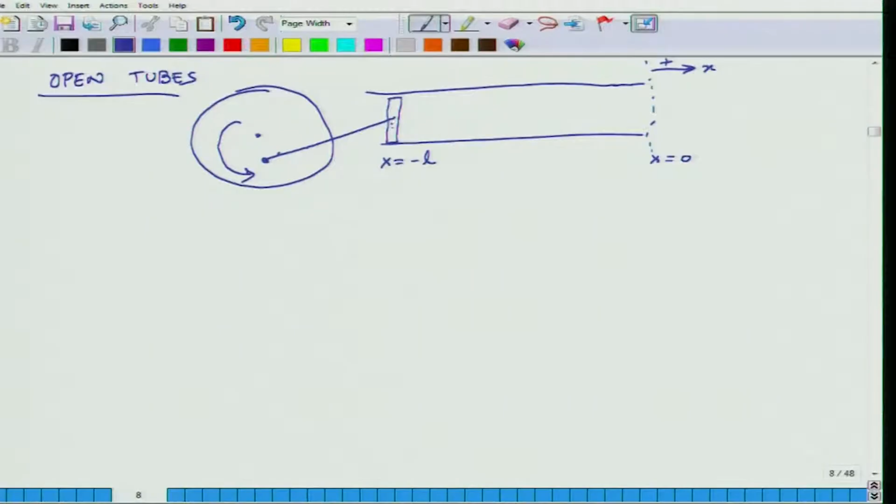In the case of the closed tube, we had said that we know the pressure at x equals minus L. Today we will make a little different assumption: because I know how much the piston is moving, we know the value of US, the source velocity, because this is where the source of sound is. So velocity at minus L at any time is given as some real constant US times cosine of omega t plus phi. So this is the velocity at x equals minus L.

So once again we have two boundary conditions. There is an open end at one end of the tube, and then the other end, x equals minus L, where we know the source. Now at the open end, we have to convert this physical situation into some mathematical relationship. So we know that the ambient pressure here is P naught, because the overall atmosphere is there.

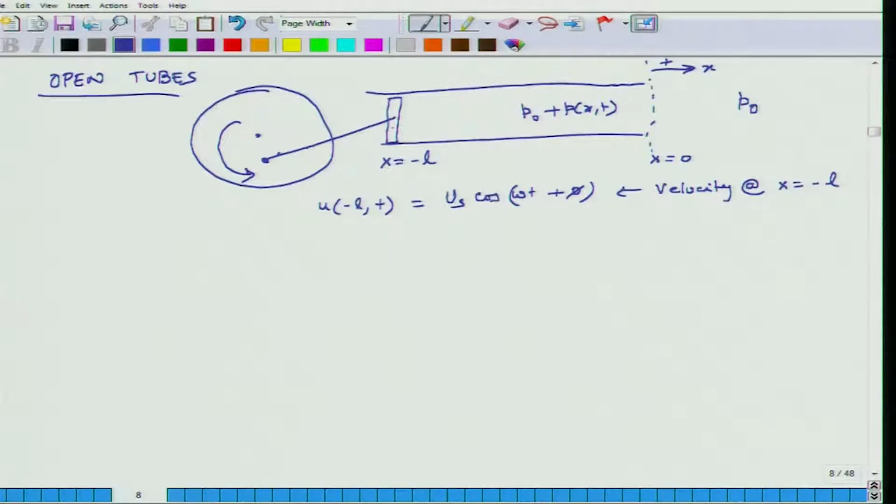Inside the tube at all points we have P naught plus p as a function of x and t. So the pressure inside the tube is P naught plus a small perturbation in pressure, lowercase p, which varies with x and t, and outside the tube the pressure is P naught. What that means is that as I approach this boundary, the magnitude of p has to become less and less, and at the boundary p of 0 and t should be 0.

So this is one boundary condition from a mathematical standpoint: when you have an open tube, at its open end, in this case x equals 0, the value of p, the perturbation in pressure, is 0. And the other boundary condition says that I know the particle velocity at x equals minus L, and that is the same as the velocity of the piston, which is US cosine omega t plus phi.

So these are the two boundary conditions, and just like in the case of the closed tube, we again have 4 unknowns, 2 equations, and the 2 extra conditions are these 2 boundary conditions. Once we apply them, we get the solution for the system. So we will do a similar thing as in the case of closed tubes. We begin by writing these transmission line equations. So these are general transmission line equations which are valid for all 1D planar flow situations.

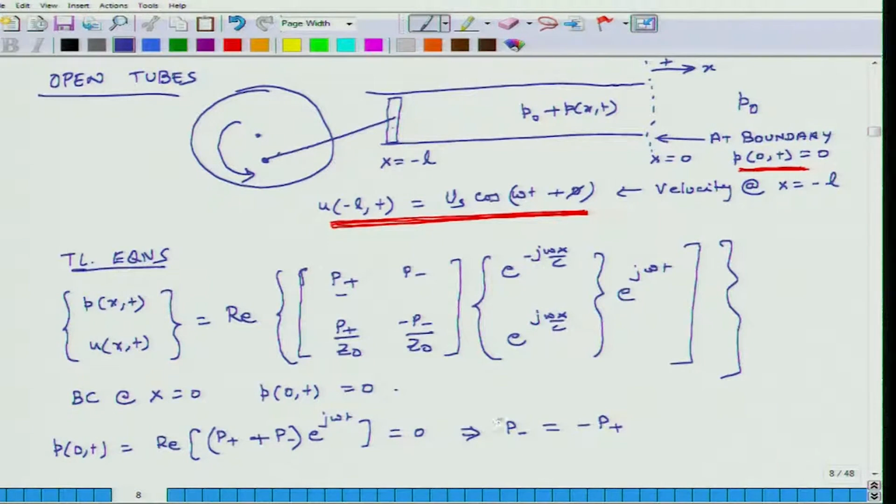And this gives us the condition that P minus has to be equal to minus of P plus. Okay. So I put this condition back in my transmission line equation, and I replace P minus with negative of P plus.

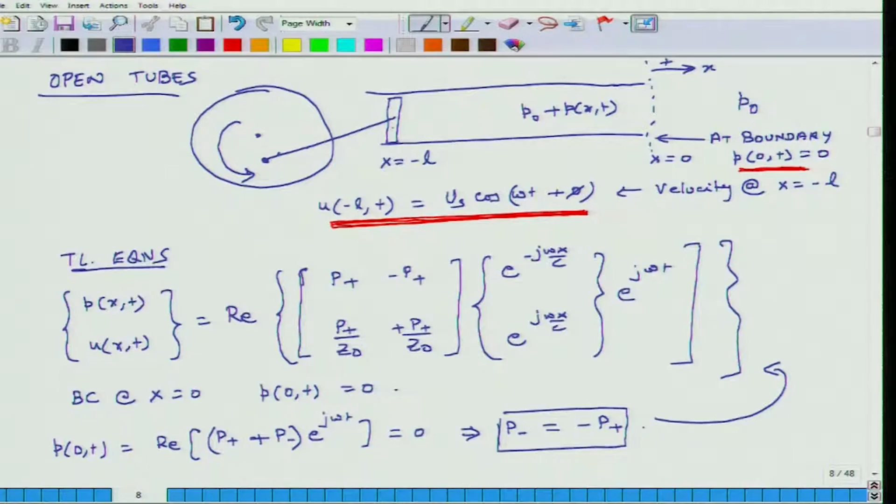So, I am left with, and here I get a positive of P plus. Okay. So, now I have used one of my boundary conditions, and what I will do is I will again rewrite these equations, and this is equal to real of P plus (e^(-jωx/c) minus e^(jωx/c)) e^(jωt).

So, this is the equation for pressure using this modified transmission line equation, and the equation for velocity is real of P plus over Z0 (e^(-jωx/c) plus e^(jωx/c)) e^(jωt). Okay. So, these are the transmission line equations for open tube. Doesn't matter what is the condition at the other end where the piston is moving back and forth, but as long as this end is open, these equations are good.

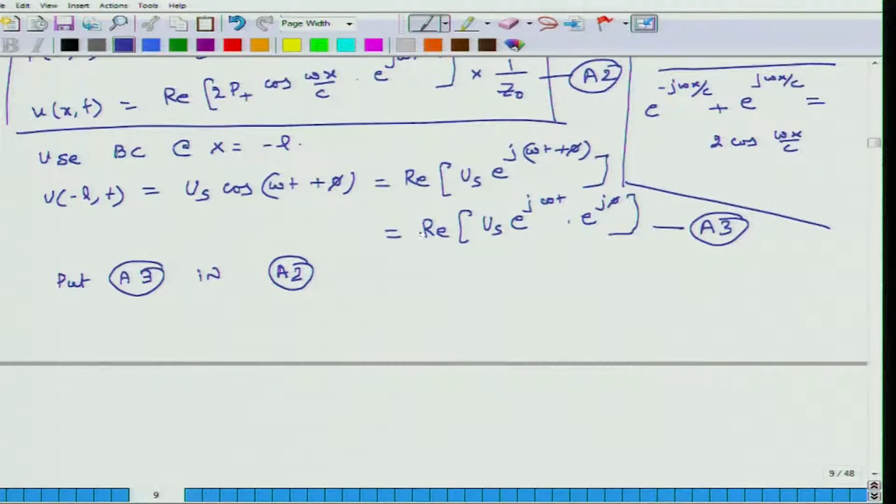So, let us call this equation A1, this equation A2, and this equation A3. So, what we do is we put A3 in A2, and we solve for P plus. So this thing goes on the left hand side. So, what I get is real of US e^(jωt) e^(jφ) equals real of 2P plus cosine, and here the value of x is minus L, and cos(-ωL/c) is the same as cos(ωL/c). So this becomes cos(ωL/c) e^(jωt) times 1 over Z0.

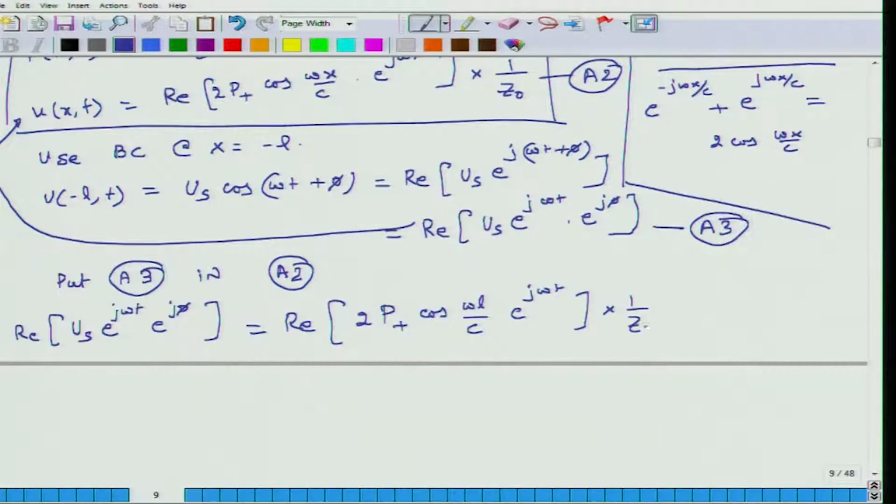Okay. So if these two sides have to be equal, then the terms in the parenthesis have to be the same. So I can drop the real, and then e^(jωt) and e^(jωt) cancel out, and what I am left with is that P plus equals US times Z0 divided by 2 cos(ωL/c). Yeah. So this is my A4.

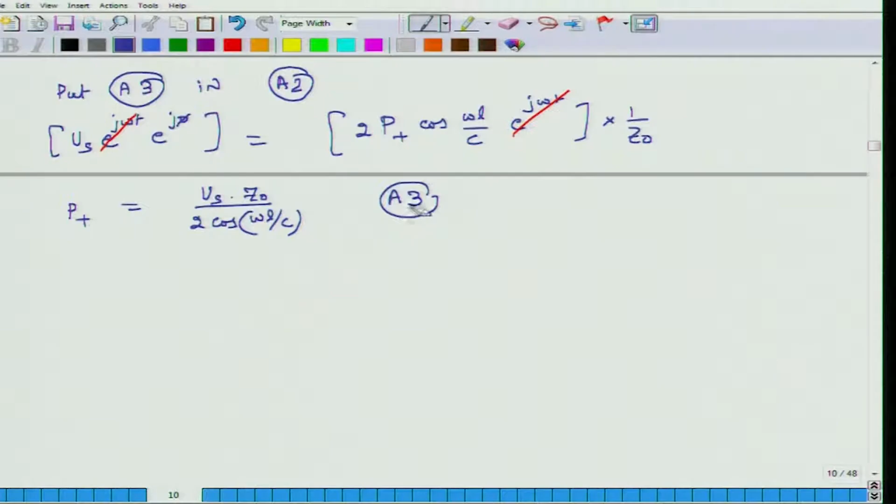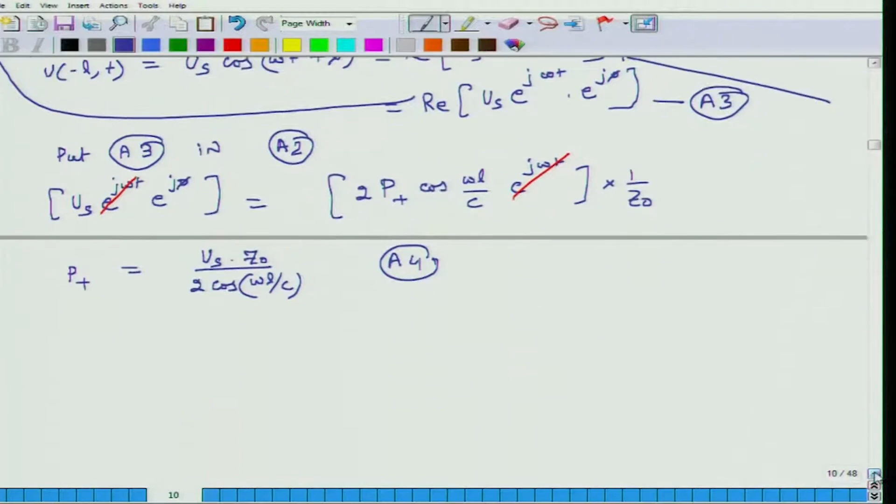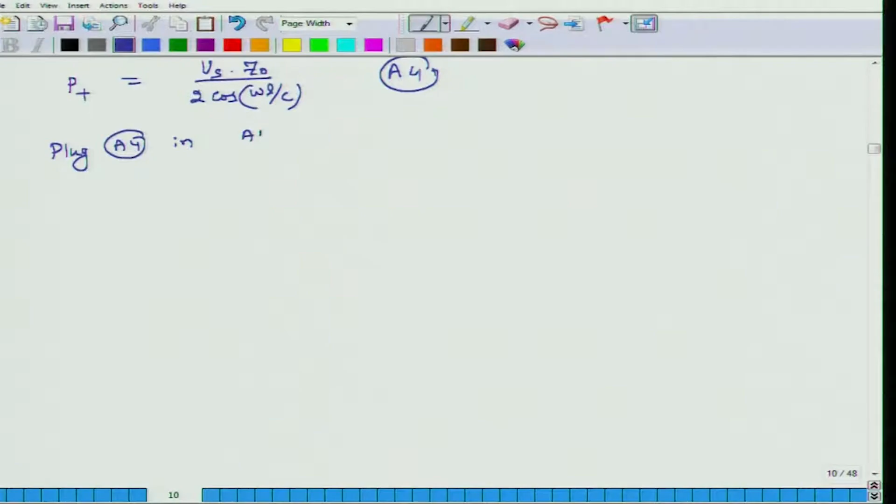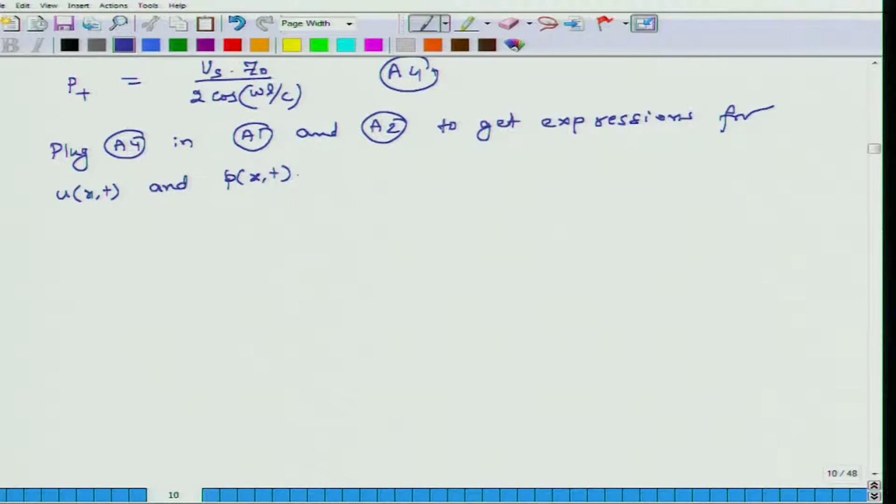Okay. And now what I do is I plug equation A4 in A1 and A2 to get expressions for pressure and velocity, u(x,t) and p(x,t). And if we do the math carefully, I am going to write down the final relations. The final relations look like this.

So pressure is nothing but US Z0 over cos(ωL/c) times sin(ωx/c) times sin(ωt plus φ), and u(x,t) is equal to US over cos(ωL/c) times cos(ωx/c) cos(ωt plus φ). So once again, these two equations represent propagation of sound in an open tube, and these are the functions for pressure and velocity.

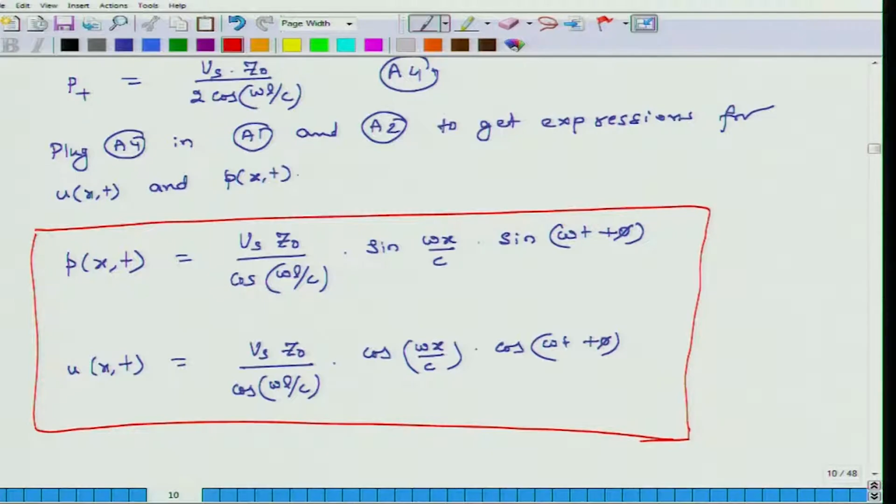And as we saw in the case of closed tube, here also we have standing waves, but the difference is that in the case of closed tube, the standing wave for velocity had a value of 0 at the closed end, and the pressure was maximum. In this case, the pressure at the open end is 0, so its amplitude is minimum, but the velocity is maximum at x equals 0. So this is the fundamental difference between these two standing waves. So this closes the treatment of an open tube.